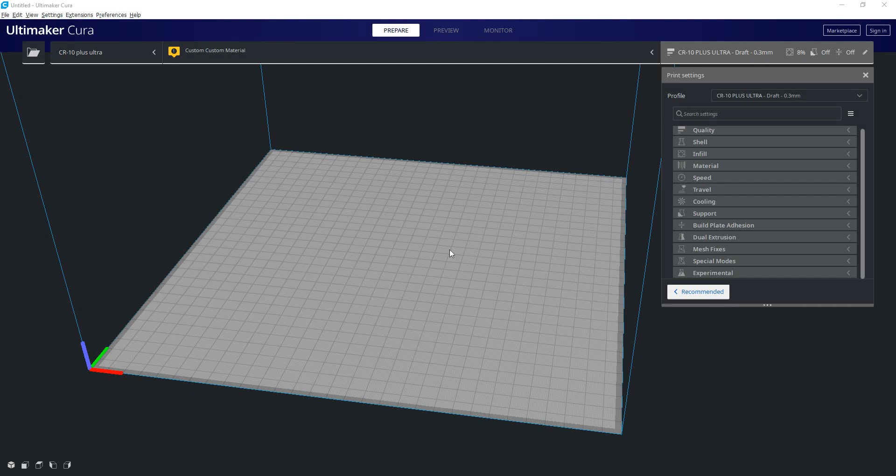So the first thing I'm going to do is load in a quick model here. So you can see we have a little support tower test. So I'm going to turn on our support material, and using just our default support options, we're going to hit slice. And we're going to take a look at it by hitting this preview button here.

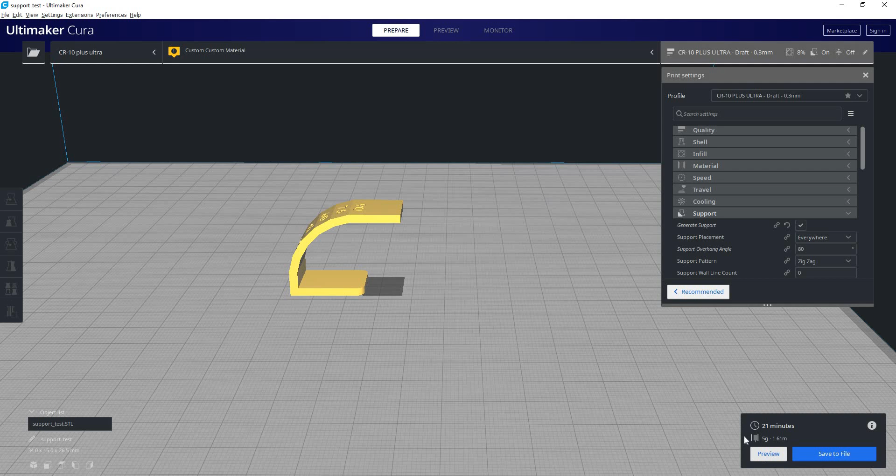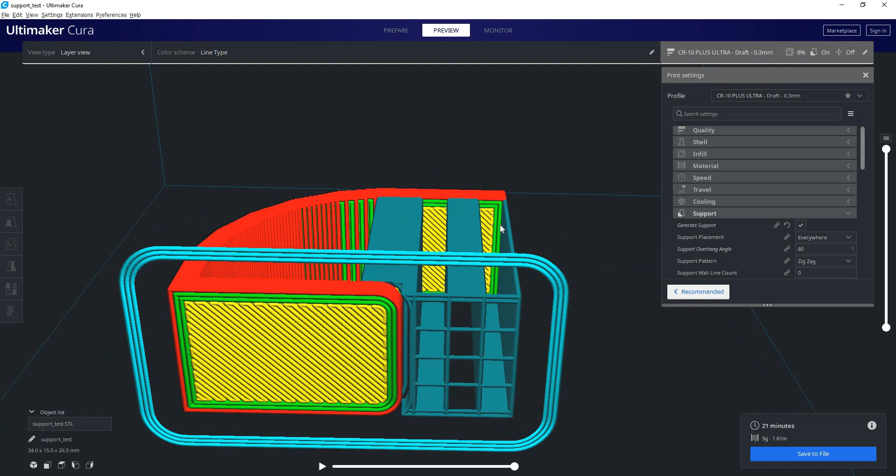So now we have our G-code visualized for us, and we can see the blue that is our support structure here. So the first thing we're going to do is analyze it and determine how well it's going to actually support our part for us. So by looking in close, one of the first things we'll notice is the zigzag pattern that it uses. So you can see here our pattern is zigzag. There are quite a few patterns here, but most of them I do not suggest. Zigzag is pretty much the best one out there.

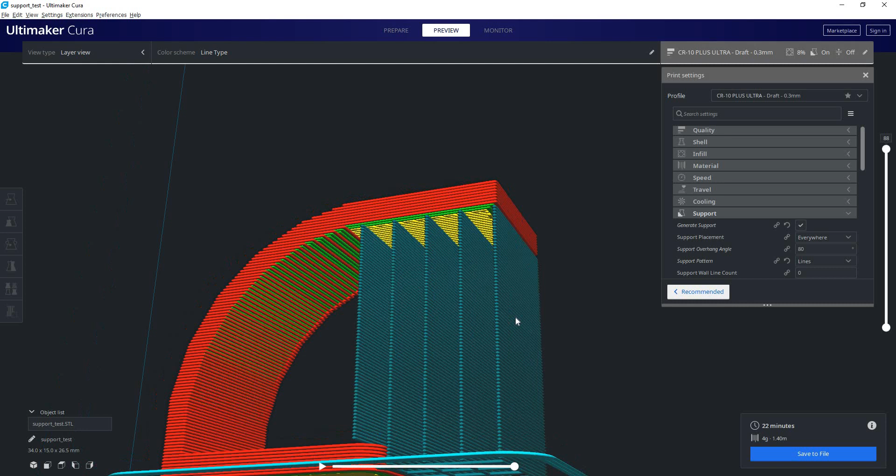So if we go to lines here, we can see that these support pillars are not actually connected to each other. So these are going to be very thin structures that are going to be very easy to fall over or fail. So that wouldn't be a good option to use.

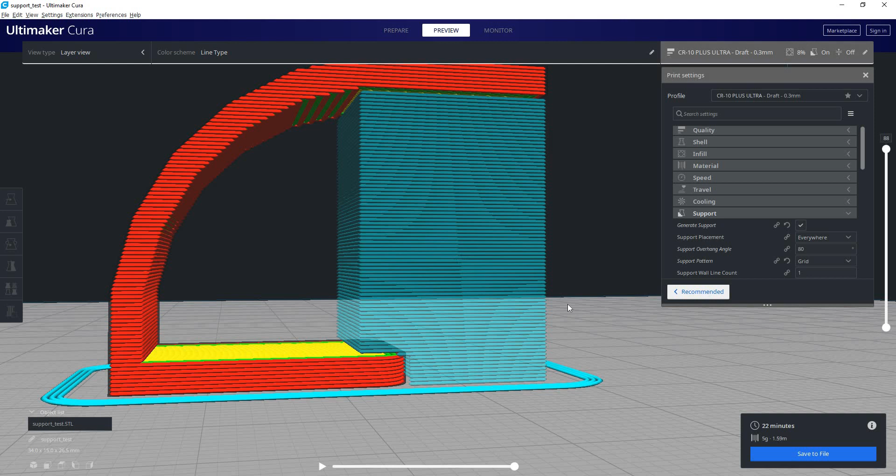We can go through the other ones and we can see a grid here. And the issue with this grid pattern is you'll notice it is fully enclosed on all sides, turning it into a rigid box. And we don't want a firmly rigid support structure because this is going to be very difficult to remove because you can't squish it to tear those layers out. It basically has to come out as a solid unit, which isn't really going to work for a part like this.

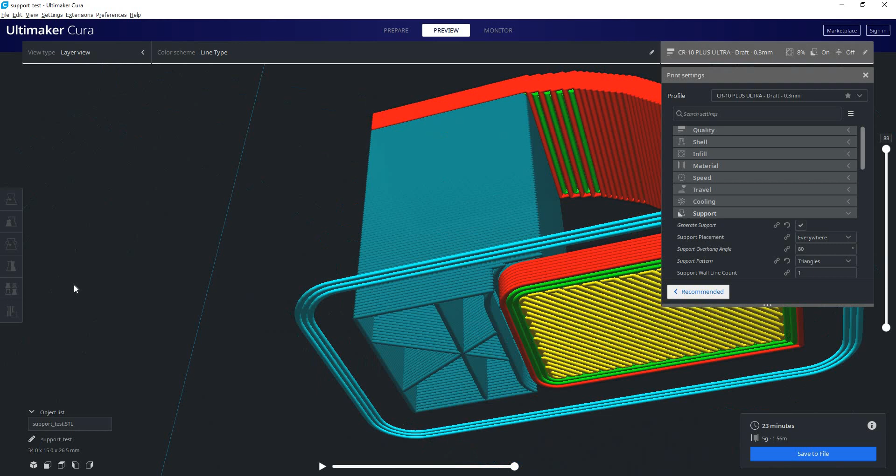We can go to triangles, and triangles has the same issue in that it fully encloses the space. You don't want a support material that is fully enclosed on all four sides like that. Concentric does the same thing as well, and then it fully encloses the spaces and puts smaller fully enclosed spaces inside.

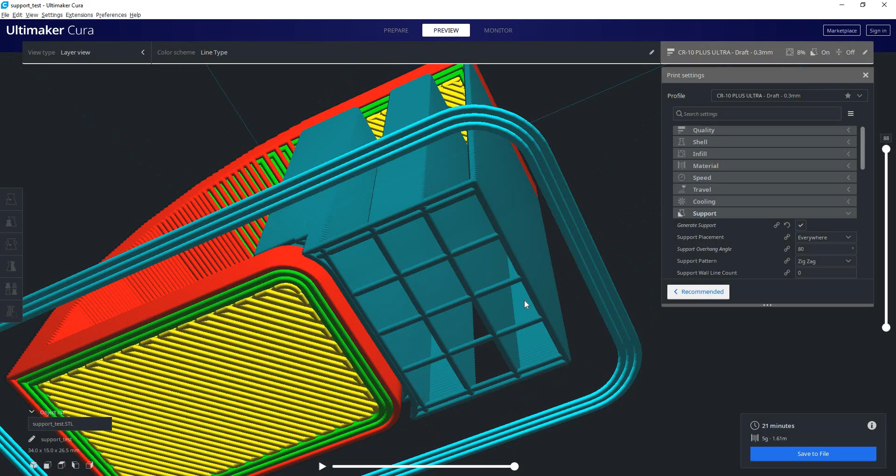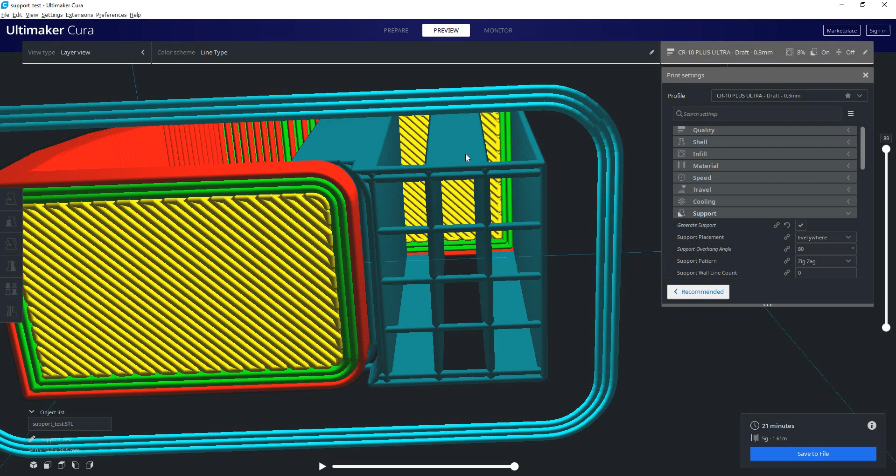But if we go to zigzag, now we can see it is not fully enclosed on all sides. There are actually two sides that are left open. This is good for removing the supports, as it leaves one direction with these long walls very rigid and sturdy so that they don't fall over, but it leaves these other two directions more squishy like a spring, which makes it very easy to just squish this with your hand after it's done to tear those supports out. So the supports are much easier to remove.

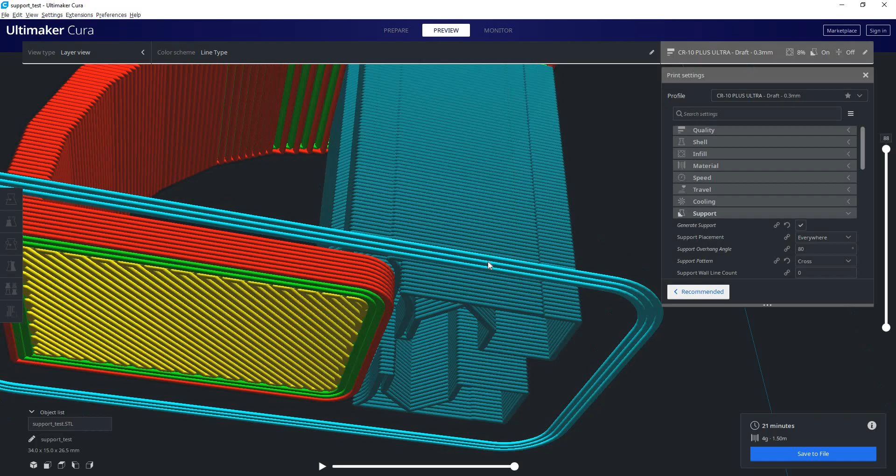We can also look at the cross pattern. So we can see here this cross pattern isn't really the best for this small part, as these structures are a bit too small to really support the structure properly. But it is open on one side, so at least it's easy to compress and squeeze it and tear the supports out.

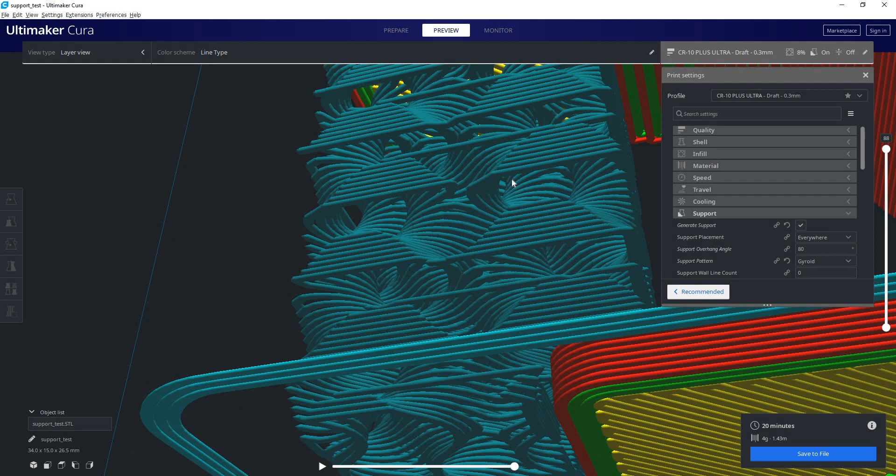And our last one is gyroid. This is just like the infill pattern that they have, but used as a support structure. But we can see here that it is not very optimal at all. We have a lot of unsupported overhangs here, which basically means our support material would need its own support material just to hold it up. So this is not going to work well at all. So that's why we always, by default, go with the zigzag pattern, as it prints nice and sturdy and it is very easy to remove afterwards.

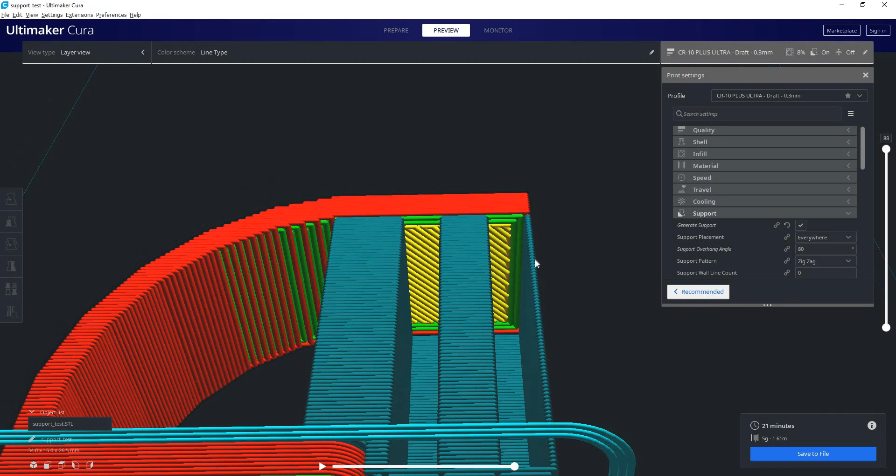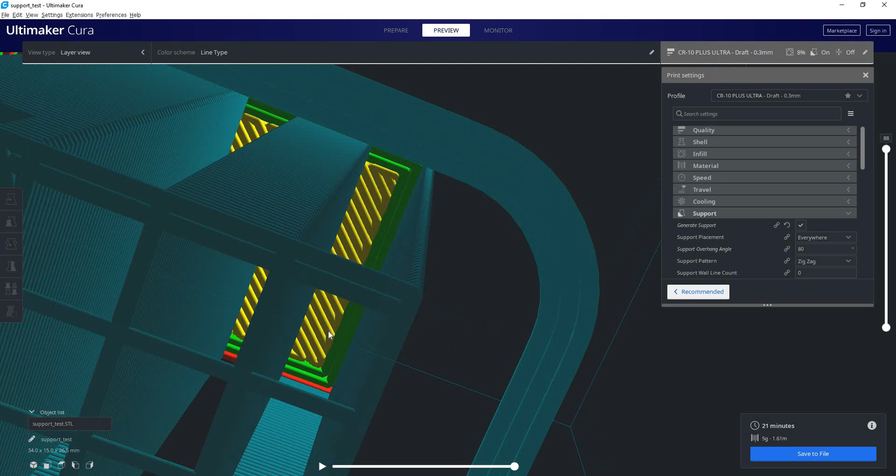Now we want to look at the interface between the support and our part. So looking up here, we can see that these outer walls and inner walls are connected. But when we get to these two corners, we can see here that these two inner walls, as well as the end of this skin layer here, are not supported at all. Only that outer wall is. And same with over here. We can see on this side, again, only the outer wall is supported. So that's probably not going to turn out too good.

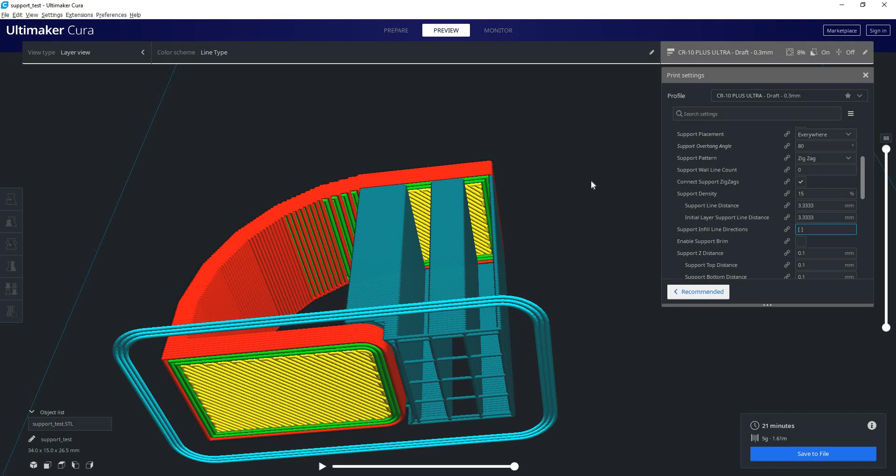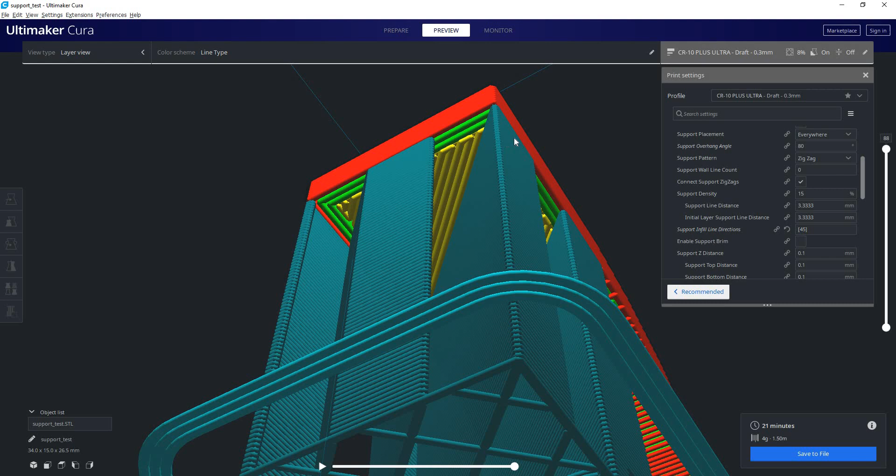So what we can do is we can rotate the infill pattern. So if we scroll down here, we can see the support infill line directions. So by default, there's no value in there. But we can set an angle and it'll rotate that support structure to that angle. So let's try 45 degrees. Now we can see that support material has been rotated. And if we look at it from underneath, we can see that we're still not getting contact on those walls there. But on this side, we do have contact all the way across, so that's pretty good.

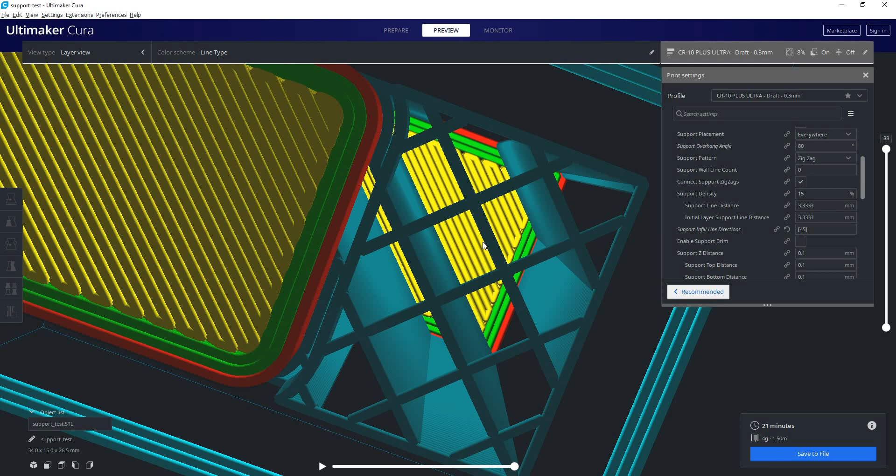Another issue, though, is that now the support lines are going parallel to our skin layers. So each support line is only holding up the one single layer that is being printed above it. And that's not good. That means all these open skin layers here are not being supported at all. So how about we rotate this another 90 degrees so that it's perpendicular with these skin layers. So we'll change this 45 to 135 degrees.

There, now we can see our support lines are perpendicular to our skin layers, which means they'll be much more supported, which is what we want. Now we can look and see we still have an unsupported edge here, but this edge is now much more nicely supported. So what we can do is we can try moving our part.

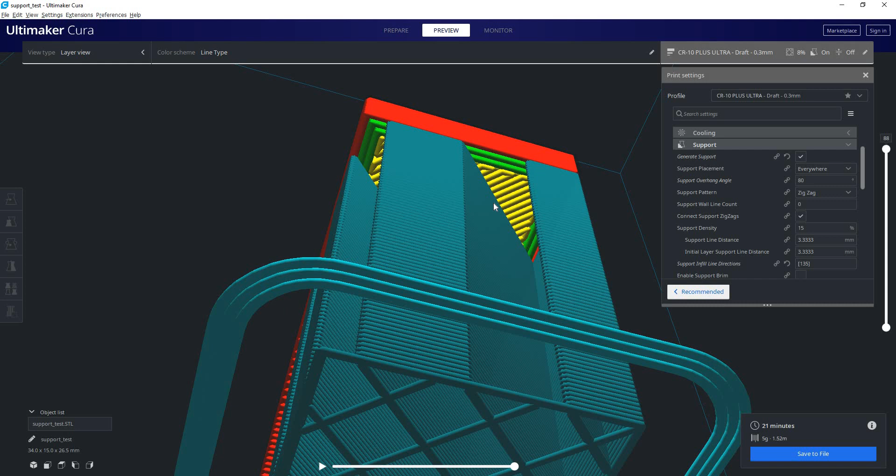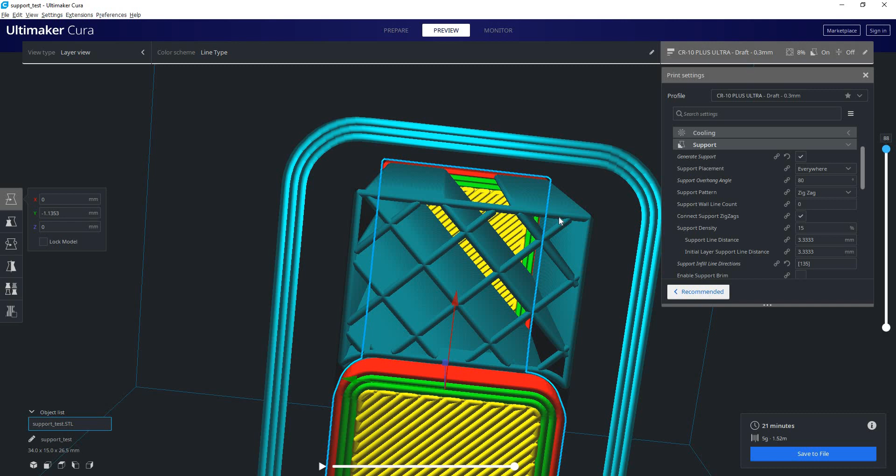As we move our part around the build plate, this grid's location will not change. So if I click on the part, click on my arrow here, and I'll move it over just a little bit. I moved it over about 1 millimeter. So now we can see that this is much more supported right on the corner there, which is where it's important.

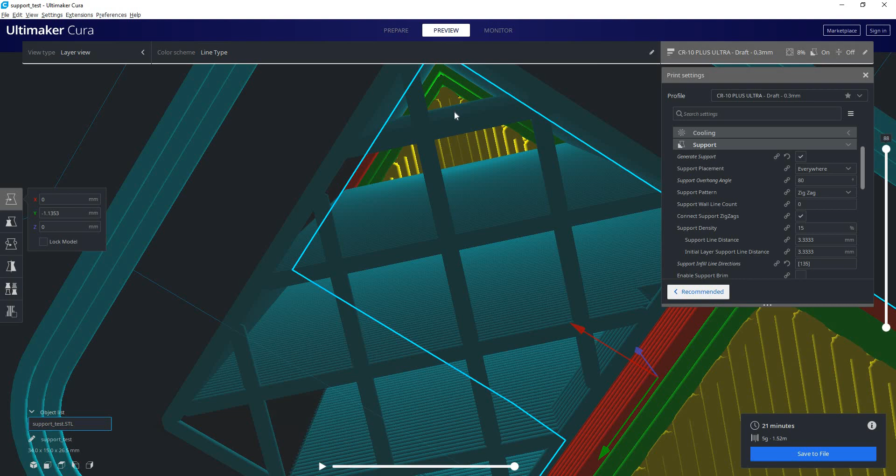Now there is a bit of unsupported areas right here at the corner, but we do have this one support line coming across here, which should provide the support we need. This is a very small unsupported area. So while it's not optimal that these corners here are unsupported, this one line coming across here should provide the support we need to get a good print.

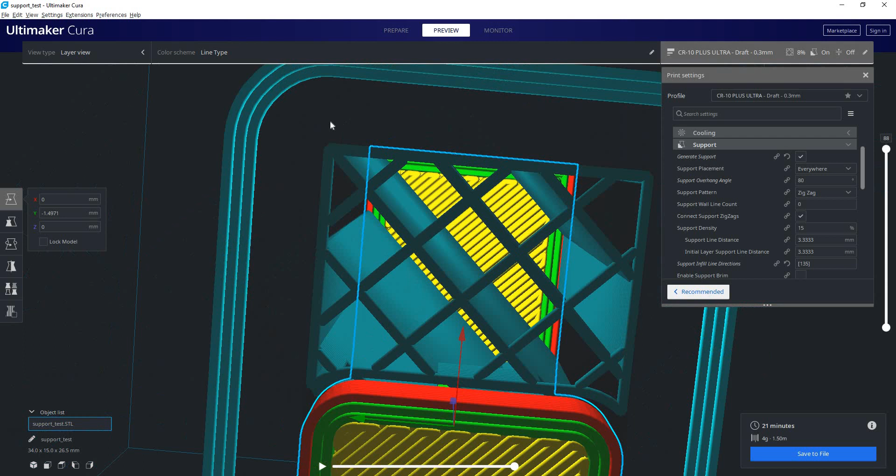And now that this line here is connecting almost right to the corner there, we know this will be good as well. But if we want, we can move it over just a hair more. There, now it's exactly on the corner. Although we can see this one is now more unsupported.

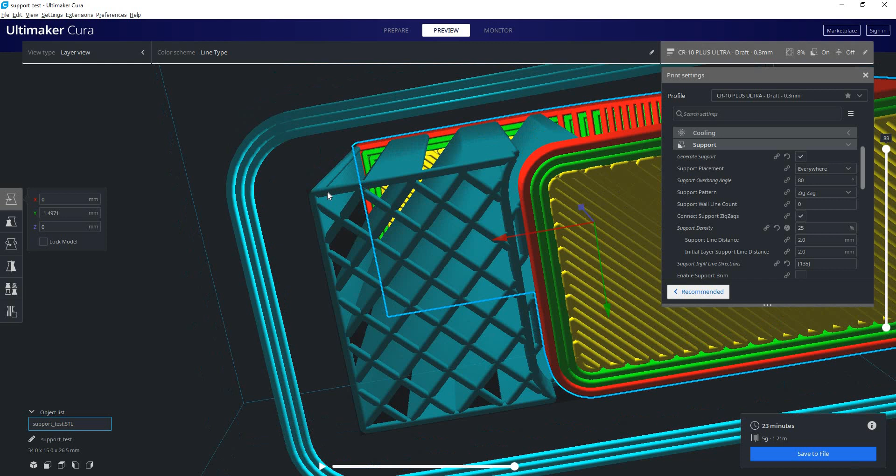So what else can we change? Well, we have our support density here. By default, we use a 15% density, but let's try going up to 25%. That's usually on the high end of support densities. I don't recommend using higher than that, but you can if you need to. So now we can see this little corner is still unsupported, but this support line has been brought much closer to that corner, so that should help as well.

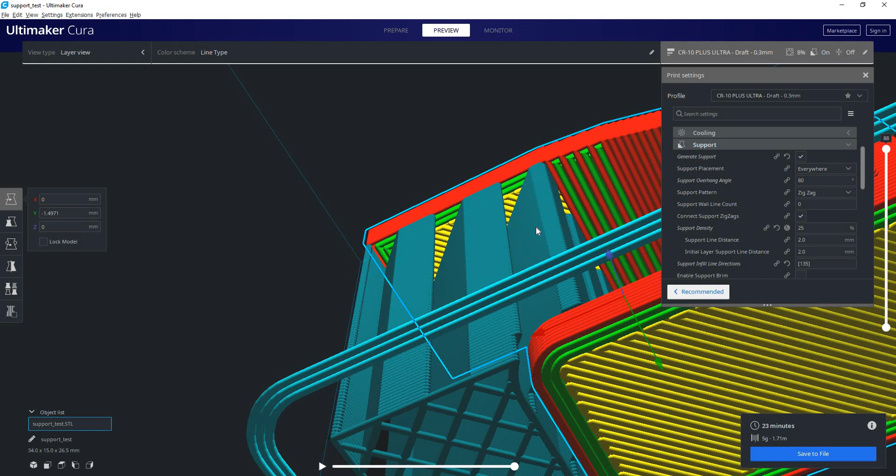We can see that corner is still supported well. We got this corner here. Looks like it's got good support, as does this corner here. So now we should have good support on this flat face, and these should be nice, well-placed supports. So we can be pretty confident in this print now.

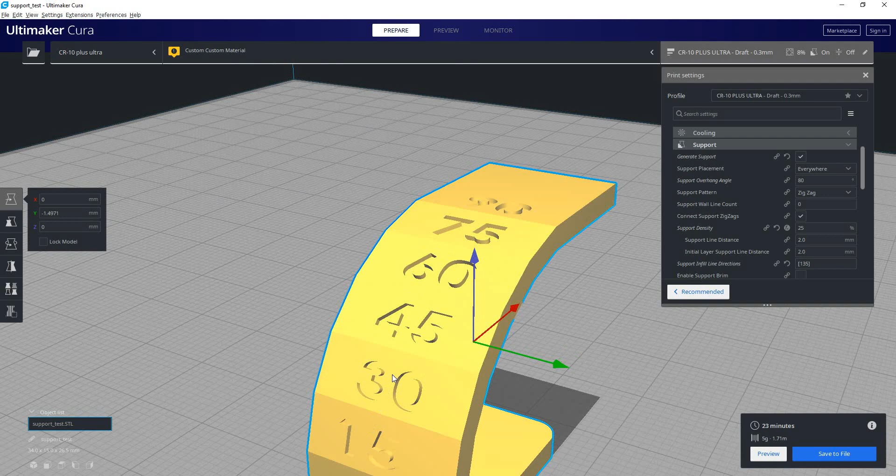But a few other things we should look at is our support overhang angle. We can see it's set to 80 degrees. So if we look at our model here, we can see the angle of these faces, and we go from 75 degrees at the highest right to a flat 90. So that means with our overhang angle set to 80 degrees, it's only going to support an angle of 80 degrees or higher. And that's why it does not support this 75 degree overhang, only this 90, because 75 is less than 80. So if we put this to say 65,

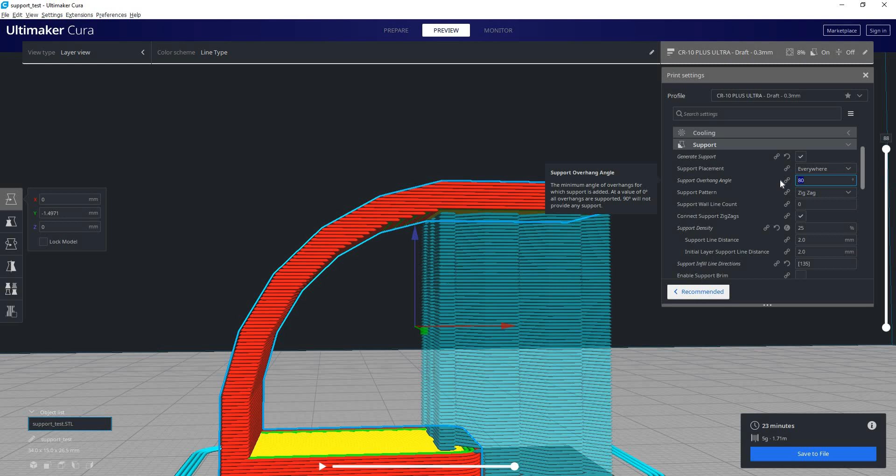now we can see that support going much lower. And even though this one angle here says 60 degrees, and ours is set to 65, it still seems to be supporting it somewhat. This outer edge has support, but the rest inside there does not.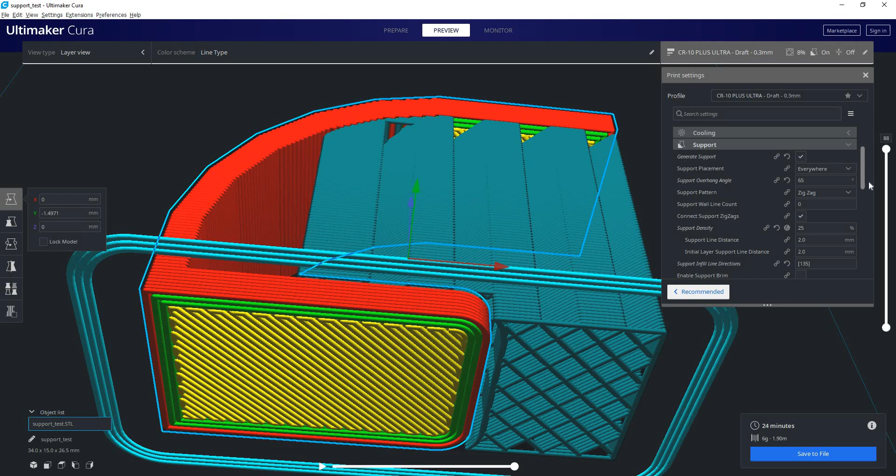But how do you determine at what angle your part needs supports? Well, the first thing we'll do is hide our support materials so we can look at this part clearly. So here's the trick to determining if a part needs support or not. You want to look at your part from underneath, just like I am, and you want to look at these outer walls.

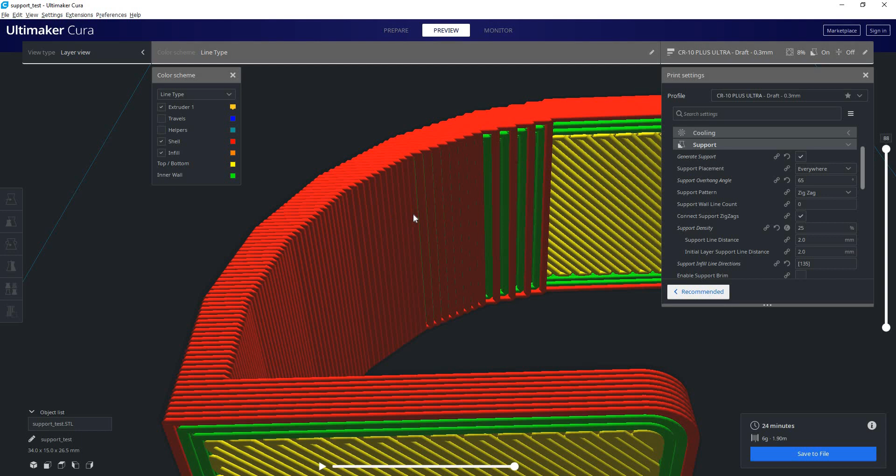If we zoom in real close here, we can see how these outer walls are all nice and perfectly red. But then we get to here, and we can see a bit of green peeking out, and here we've got much more. We can see both the two inner walls peeking out from below the layer beneath it. And that's how we determine if we need support or not. Seeing these inner walls here means that not only are these inner walls unsupported, but this outer wall is also completely unsupported. Same with this area here.

While this area isn't that bad, we probably could get away with no support, we still can see that our outer walls are mostly unsupported here. So what can we do to improve our printer's ability to print without support? Well, we could tweak our settings to make these green inner walls disappear behind our outer walls. And how would we do that?

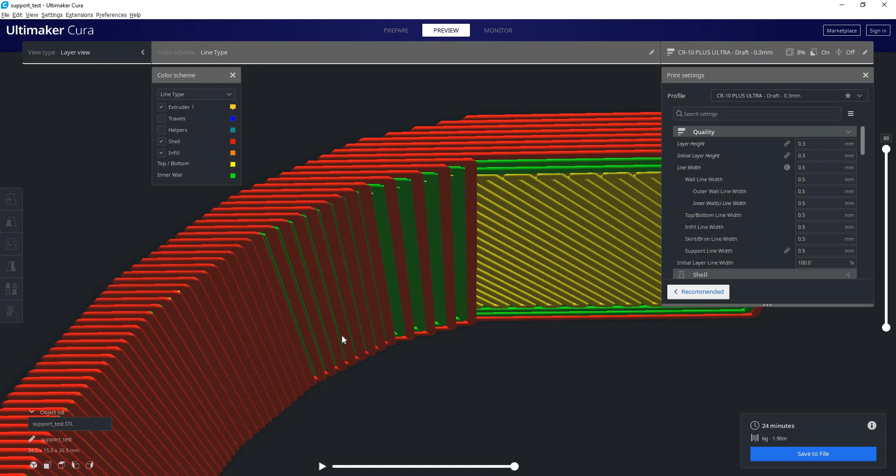Well, if we consider our layer height and our line width, right now we have a 0.3 layer height. So that's pretty tall. So that means each layer over is quite a far step. And that's why these layers are such a huge gap here, because our layer height's so tall. What if we used a 0.2 millimeter layer height instead?

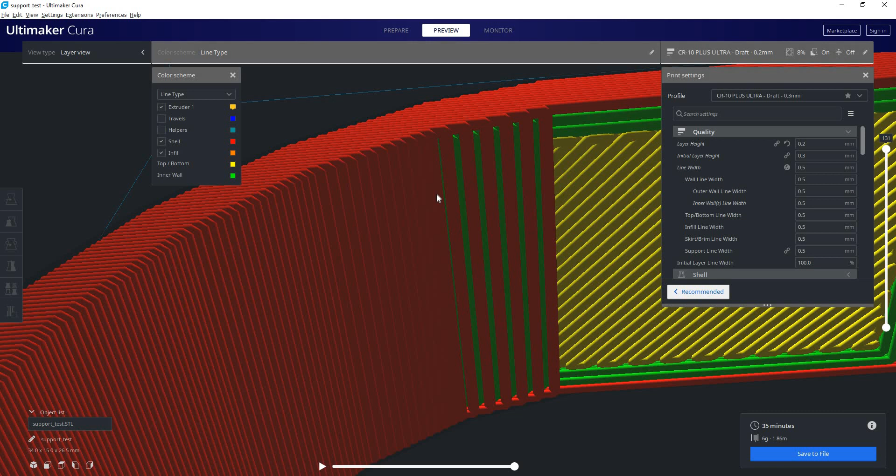Now we can see on the 60-degree overhang here, all the green is gone. So we know we can print pretty much perfectly the 60-degree overhang with no support. But up on the 75-degree overhang, there's still a lot of that inner wall sticking out, and so it's probably not going to print too well. But it's better, and that's good. So we could go down to a 0.1 mm layer height.

And now we can see all that green is gone. We got perfect red walls. This should print pretty good. Now the issue is still going to be that once we print the 75-degree overhang, we're going to deal with cooling issues, because this cross section right here is so thin that the heat inside the plastic does not have much volume to disperse through.

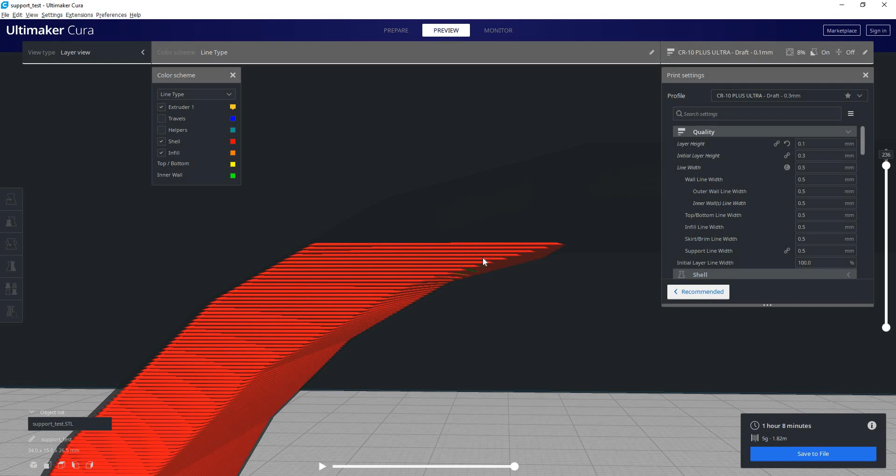It would much rather disperse through this plastic than the atmosphere around it. And there's not a lot of volume of plastic here to disperse that heat. So you're going to have cooling issues that may look like support issues. But putting support here can prevent the drooping caused by the heat buildup.

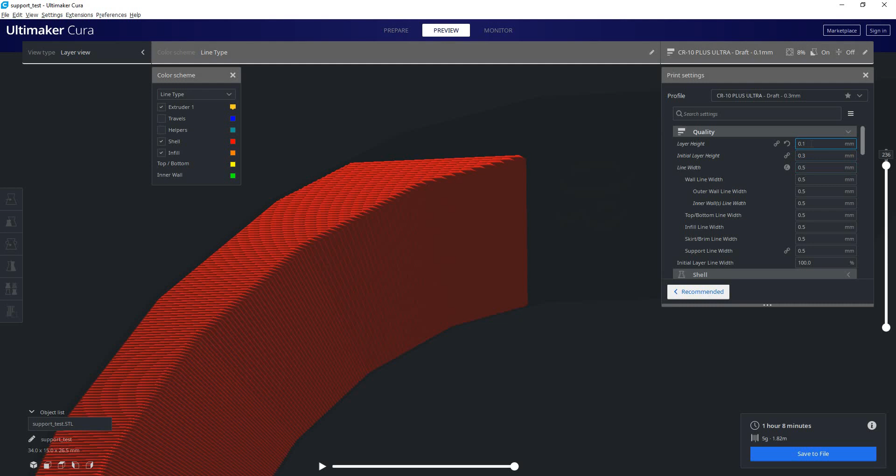You can also tweak your walls, your infill, how fast you're going, things like that, to help improve your ability to print overhangs without support. That mainly focuses on dissipating heat as much as possible. There are a few other things we can do. Say we don't want to print at a 0.1 layer height because that print would take forever.

We can do other things that will improve the quality of our overhangs while actually speeding up the print rather than slowing it down. So by reducing our layer height, we reduced our step over length, which smoothed out these curves so they print easier. We can also increase our line width rather than reducing our layer height to get somewhat the same effect. So say I had a 0.8 mm nozzle and I decided to use a 1 millimeter line width.

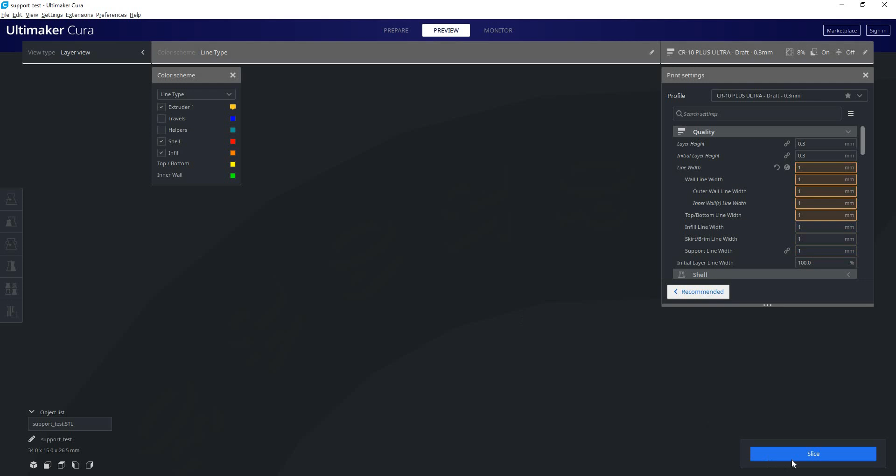Now even though our layer height is still set to 0.3, we can see now that this 60-degree overhang, all that green is gone. And if we look at our 75-degree overhang, there's only a sliver of green actually peeking out of there. So that lets us know we can print much better with these settings as well and not need support. So I'll try reducing my layer height just a little bit.

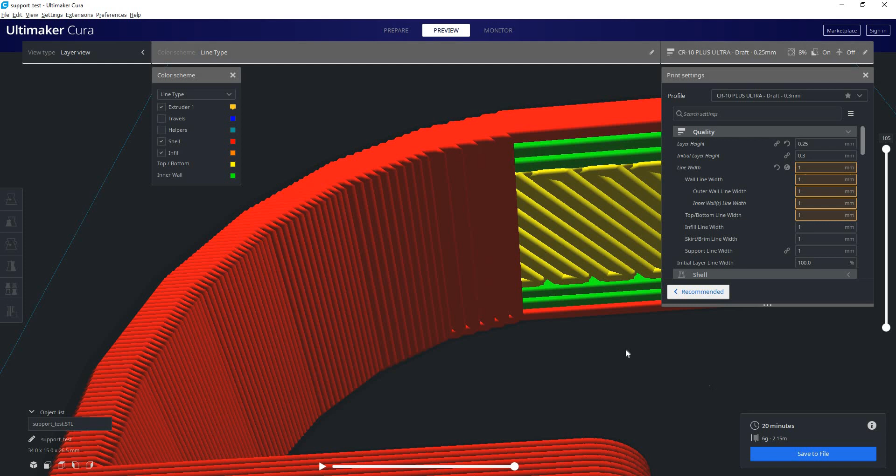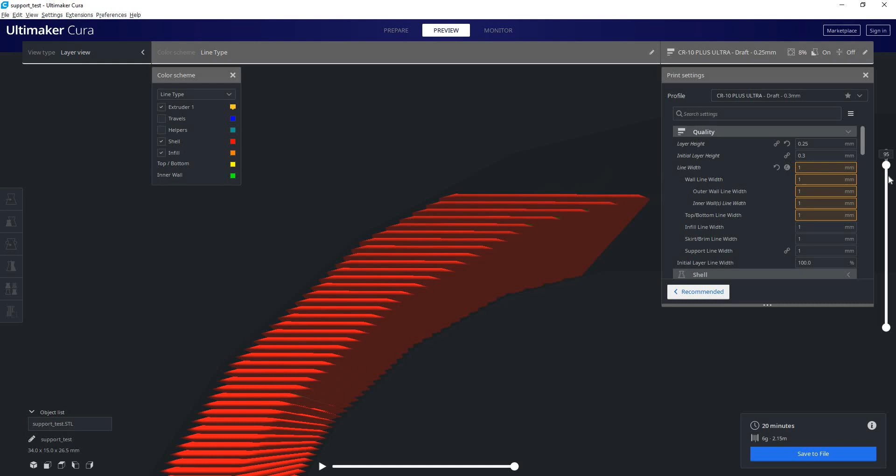And now we can see all the green of the inner walls is gone, and we're left with just our red outer walls. Now that being said, if we slice down to here, we can see there's still so much of that 1 mm line hanging out unsupported. So we may still have a little bit of an issue here, but it's important to note that you need to sort of reality check yourself and realize that even though you're zoomed in so close, you're like, oh, look at these big lines. Really, the whole problem area is only 5 individual layers in size.

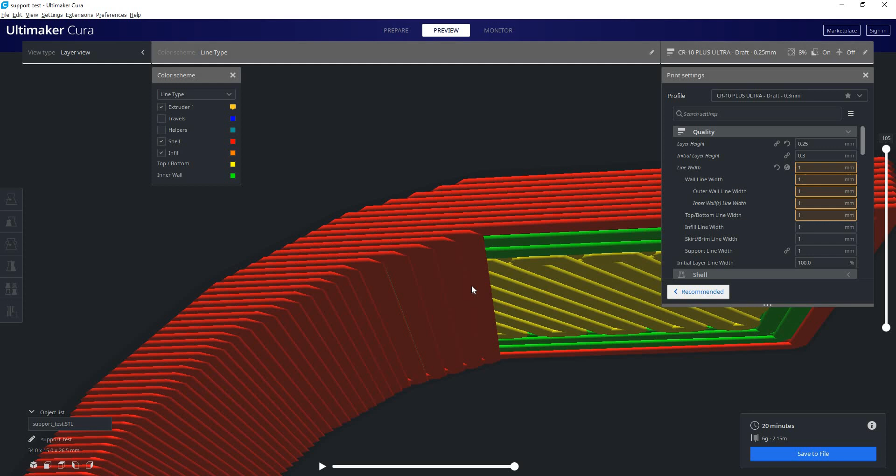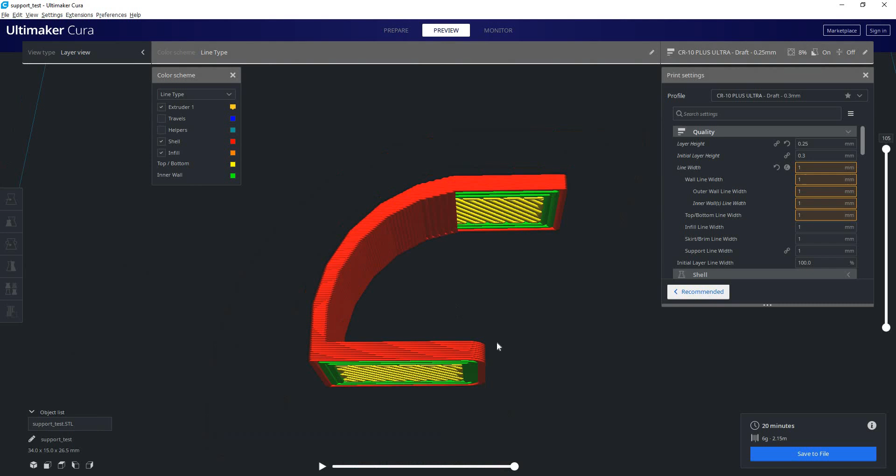And this is such a small part that it's not really going to be that big of a deal. You're looking at it so close here and you think, oh, it's so big, it's going to look so bad when it prints, blah, blah, blah. But in reality, this is a tiny, tiny little part, and a few seconds of cleanup is all you're going to need to make that look good. The issue arises because you're looking at it so close. But you got to remember, it's just a tiny little part. It's no big deal.

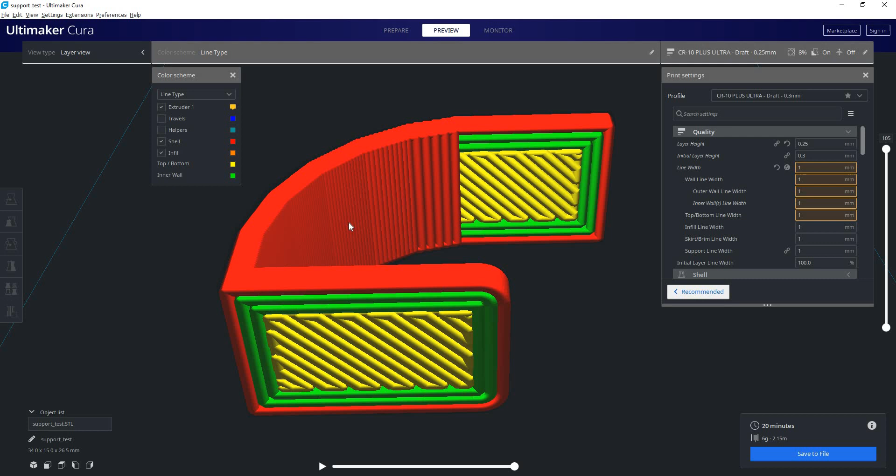So now we have a nice smooth red curve here. So we can probably get away with using much less support material. And this is how you check whether parts need support material. If you're printing a huge bust of something, you can just look at it from underneath like this and determine how many inner walls you see peeking out there. We'll set our profile back to default.

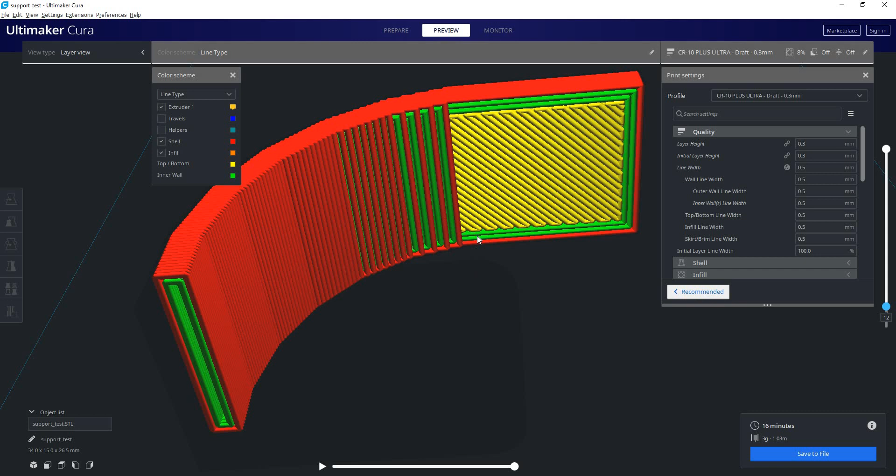Another thing we can do is drag the slider from the bottom to actually cut away the bottom layers. That gives us an even better opportunity to look at it direct from underneath. So now with our default values of a 0.3 layer height and a 0.5 line width, you can see all that green that's sticking out here. So we know we're going to need support on this 75, but this 60 degree, even though there's a hair of green there, it should print fine without supports.

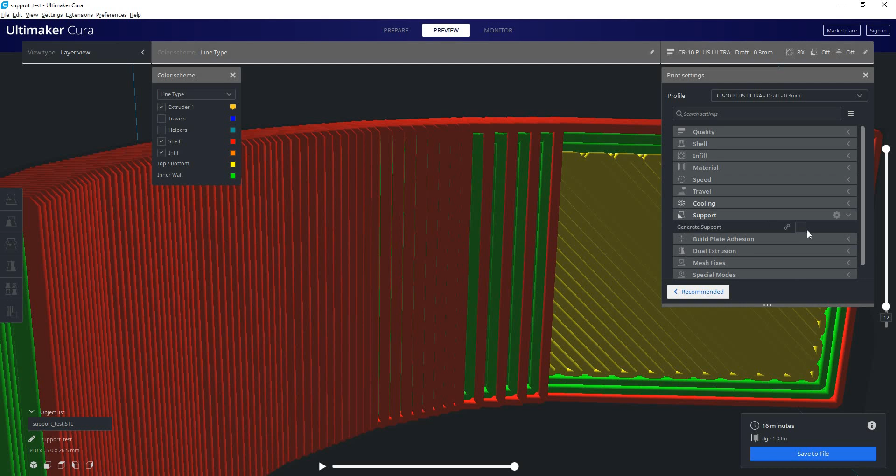So if we go back to our support settings, we'll turn those on. And there are a few other settings here we can go through. So you can see our support placement is set to everywhere. And that means that the support, not only will it generate on the build plate straight up, it will also generate on the part and go straight up.

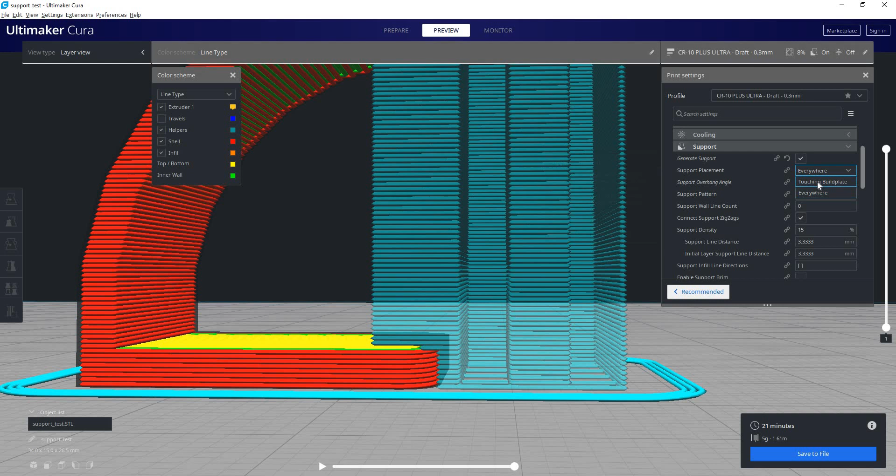So if we change this from everywhere to just touching the build plate, we can see that this area of support is now gone because it cannot touch the build plate. It's stuck on the part. So that's an important setting to consider. We usually have it set to everywhere.

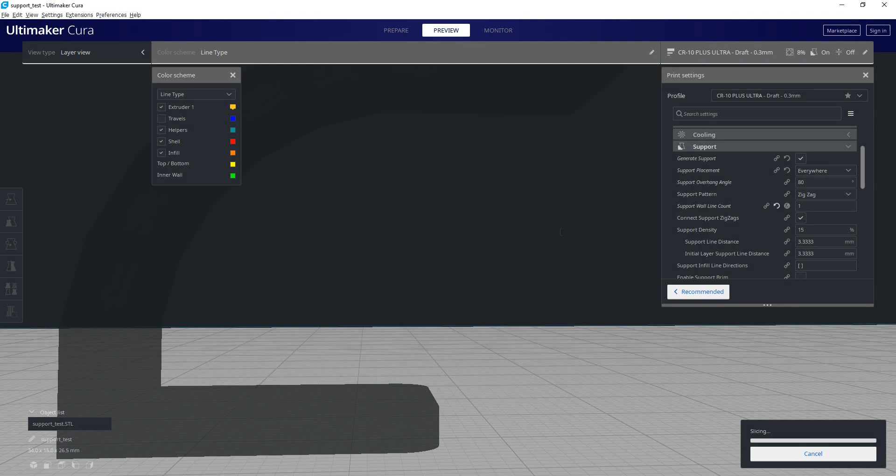Support wall line count will put walls around the outside of your support material. But remember what I said earlier about solid blocks not being optimal as support structures. Now that wall has completely encapsulated the support structure, turning it into one rigid structure, which again is not good for having to remove that support material afterwards. So usually support wall line count, you want to keep that at 0.

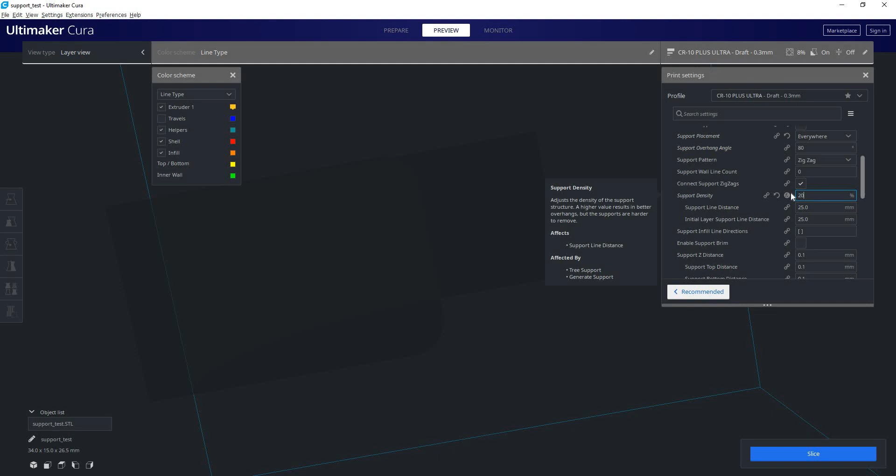We can also adjust the density, which I had done earlier. 15% is our default. I'll go up to 25% if I need to, but a range of 15 to 25% is pretty good. So we can set this to 20, and we'll see that our density has increased a little bit, providing a better support structure.

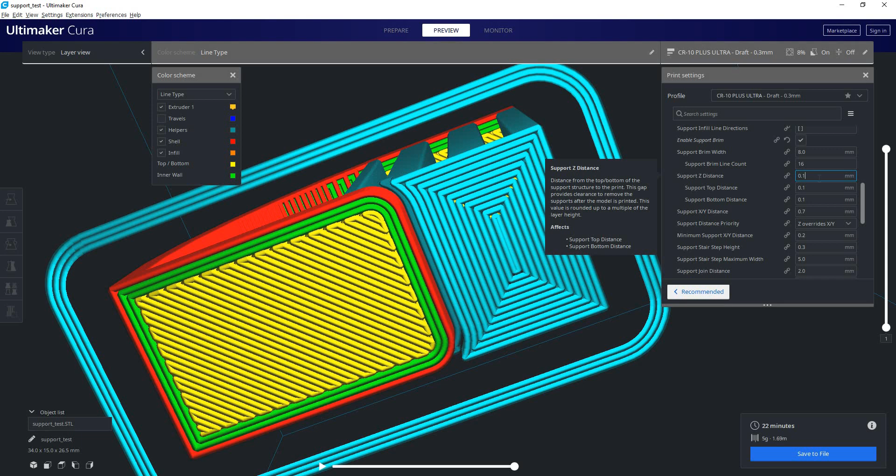We can also enable a brim on our supports just to help hold them down. So now it's got more surface area. We can also set the support Z distance, which is the distance of the gap between the top of the support and the layer above it.

Now you can see here that that distance is set to 0.1, but in actuality, if we look at this, it's not 0.1. The value will always be equal to at least one single layer height. We can see there's a single layer gap there, and our layer height is set to 0.3. So even though that value is set to 0.1, if my layer height is 0.3, it will only accept increments of 0.3. So I could set it to 0 for no gap, 0.3 for one gap, or 0.6 for a 2-layer gap.

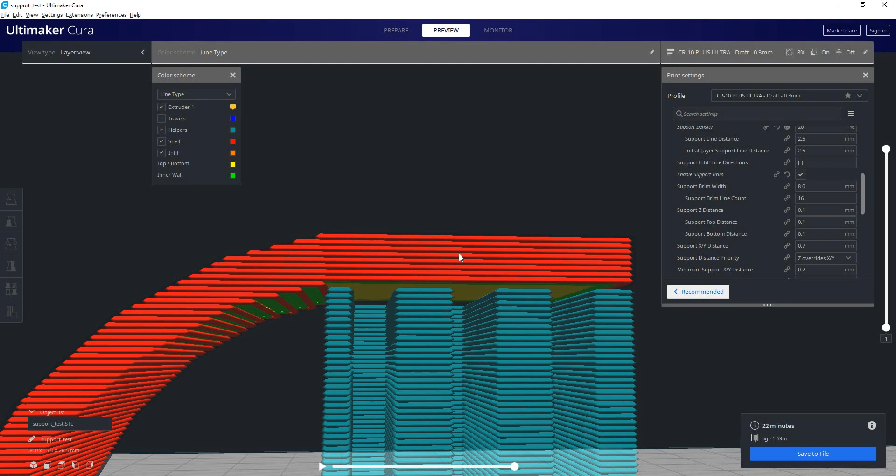And that's why people printing at low layer heights like 0.1 and 0.2 have such an issue removing their support material, because that gap is so small, it's basically fusing it directly to it. But with a 0.3 mm layer height, that gap being 0.3, you'll have a much easier time removing supports. You'll also have the added benefit of much faster prints as well.

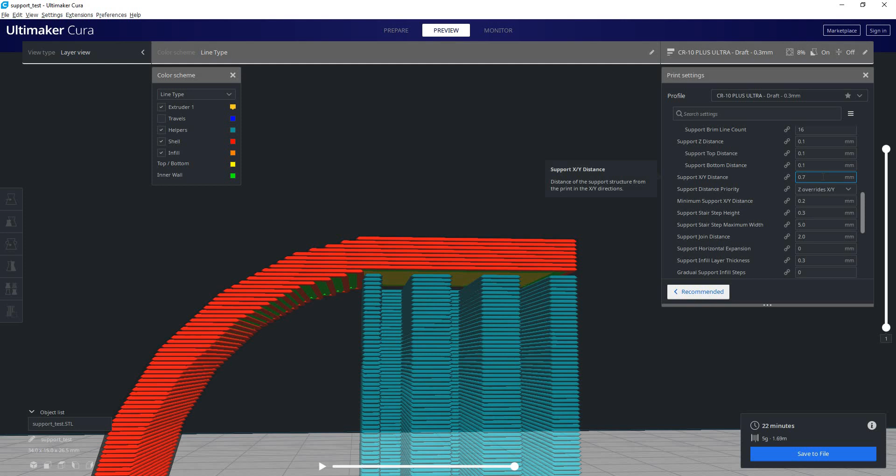Last few settings are the support X and Y distance. That's how far the support is from the sides of our part. So right now our support isn't close to any sides. Really just down here, we can see there's this little gap here between the support and the walls of this part. So if I reduce that down to 0.3, we can see that gap is smaller now.

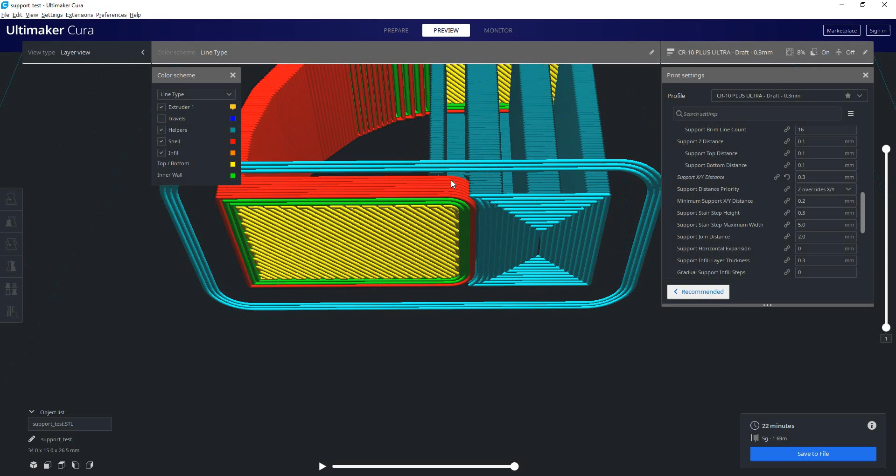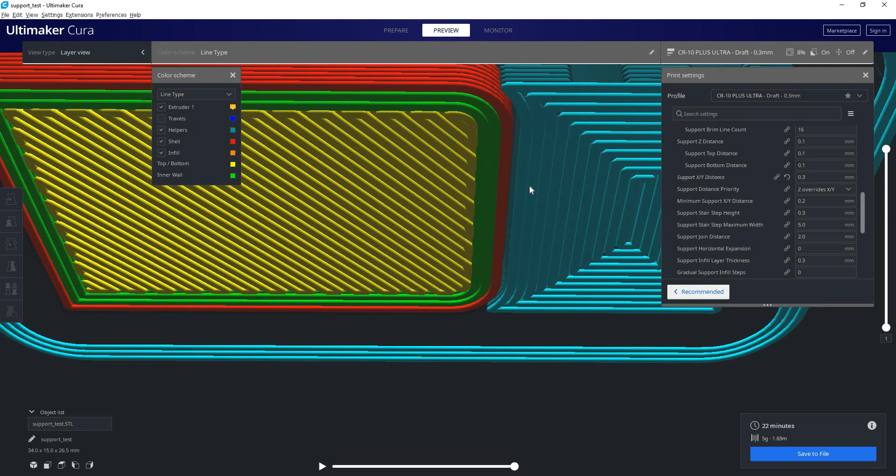So sometimes if you have a very, very small lip, it may not generate any support at all because the support can't get that close to the wall because your XY distance is too high. So in that case, if your support is not being generated, you can reduce this value to say 0.3 or another value, which may bring the support in close enough that it can be printed on that small lip. The issue then is that this little gap may actually get smushed together by your nozzle, depending on how well tuned your printer is. So that's the downside, the support may fuse to your part.

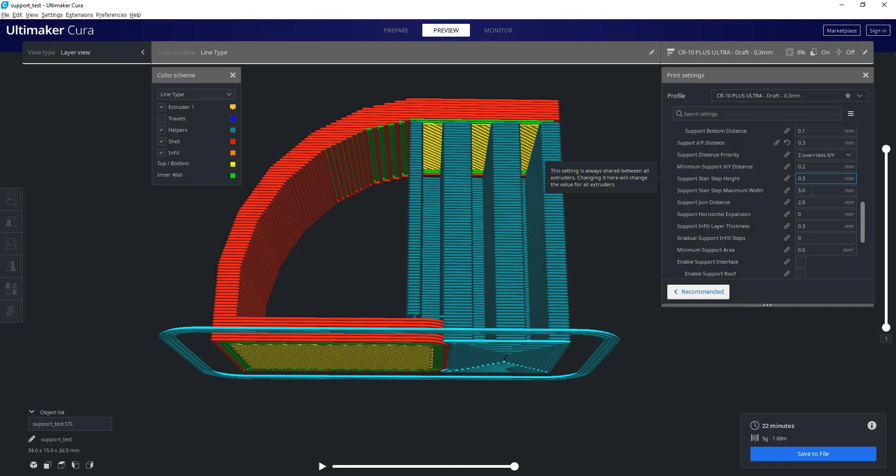There are a lot of other settings in the support section we can go through, but most of them are not really important. And you can just mouse over any setting to get a description of it. Also, with this layer view here, if you're not sure what a setting does, you can just change the value to whatever you want, hit slice, and we can actually see what specifically was changed.

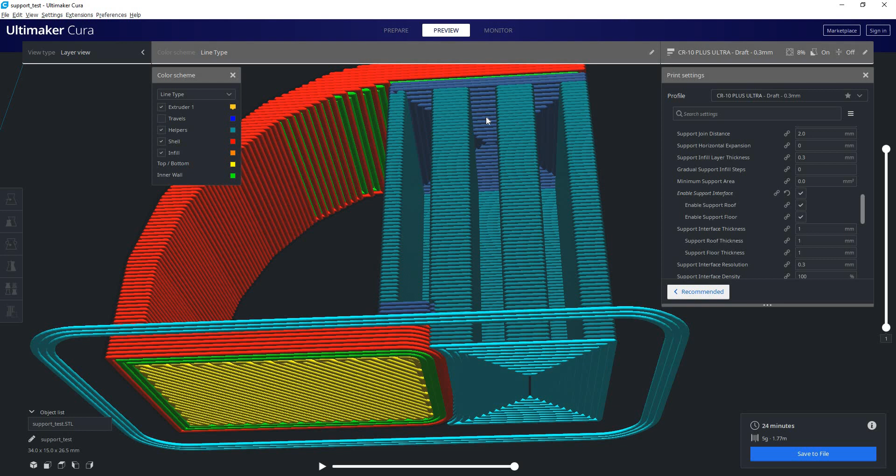There's also an enable support interface, which can be good sometimes. It's important to note by default, it enables support on the roof and the floor. So we can see there's a support structure up there, and there's one down here. Generally, I always recommend turning off floor support, unless for a specific reason you may need it, but it's going to be more of a hassle than anything. Having roof support is nice, but I would not recommend having it set to 100%. This right here is 100% solid, and that's going to cause a lot of issues trying to remove that afterwards.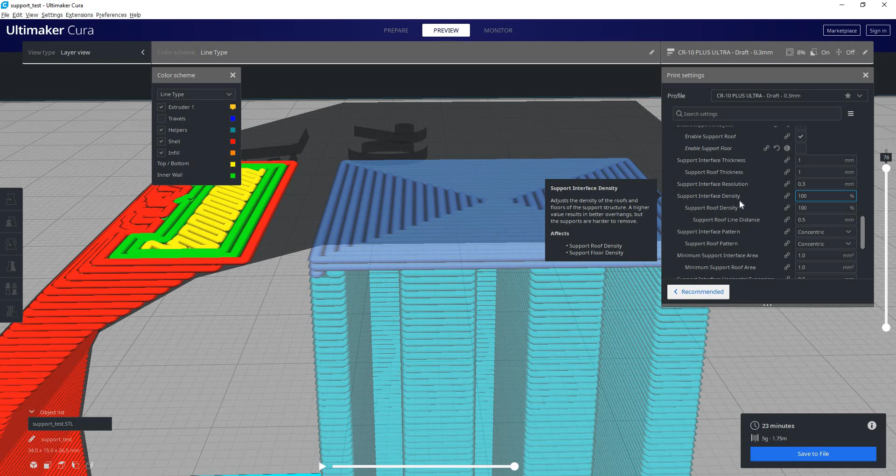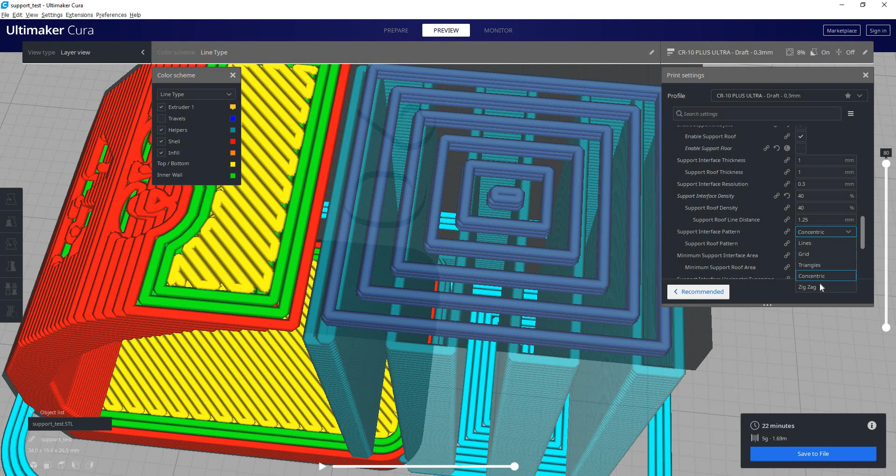But we can go here and find our support interface density. And let's drop that to maybe 40%. See what that looks like. So now we have less support touching it. But if you'll notice, all of these support structures here are not connected because we're using a concentric interface pattern. We're going to want to set that to zigzag. There, now we have more of a mesh pattern, which should also be easier to remove afterwards.

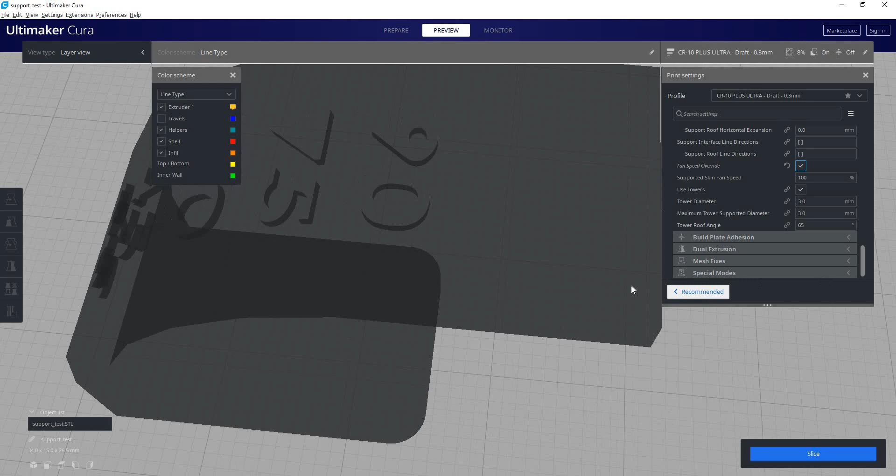The one final setting I'll mention is the fan speed override. So you can adjust your fan speed when you're doing these overhangs. And generally, if you're using a lower fan speed, you'll want to increase your fan speed while doing the interface layers above your support structure. So that would be while you're printing this layer here right above your supports.

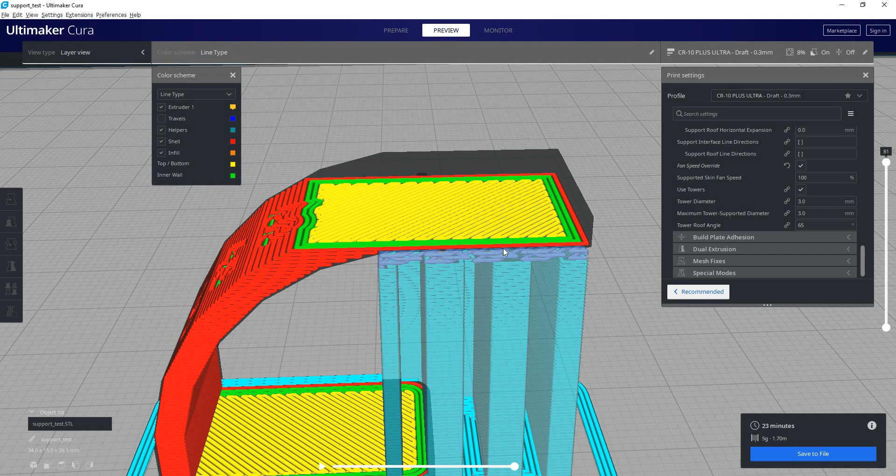The reason for that is because you want to cool these layers as fast as possible. Otherwise, they may start to merge to the support structure too much, which will make it a pain to remove afterwards. You may remove small chunks of your print if it's fused to it too much. So having a high fan speed during that time can help reduce how hard they stick together.

Alright, that's my video on support structures in Cura. I hope you learned something.